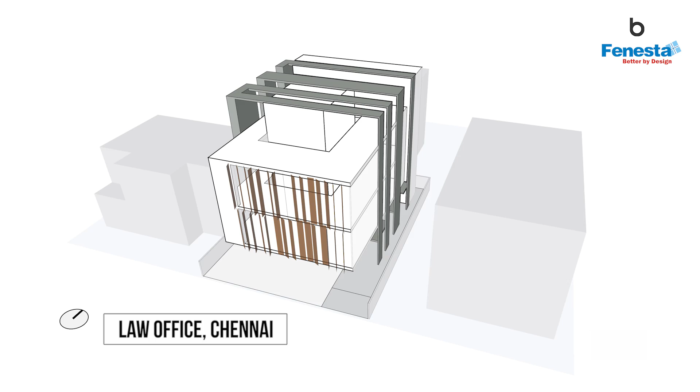This is one of our earlier clients. We started this project in 2010. This is an office for a group of lawyers called V. Shashadri and Company, and we were looking to build a 3,500 odd square feet office building in a stilt plus 2 configuration.

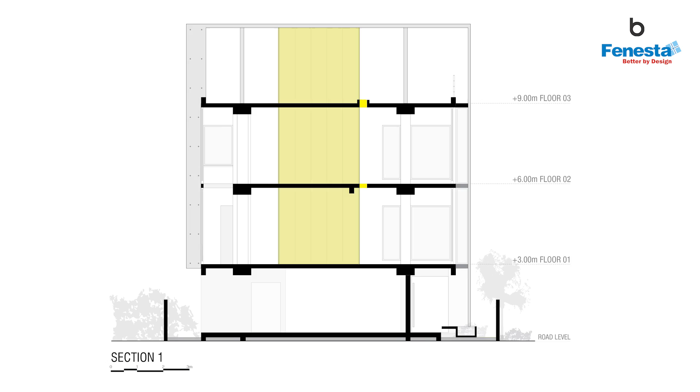Which is ground largely left open, and then 2 levels of occupied floor space above it. We needed the entire built-up area for her program spaces, and that to us was also the challenge: how do you bring in our value systems and our thinking into a project of this scale, and yet respond to the context it sits in.

So the site is located very close to the sea in a neighborhood called Besant Nagar in Chennai. It's a very low-rise but extremely dense neighborhood with a lot of vegetation.

When we went to the site, it had a small house in it, but it's almost like a void in a largely subdivided plot area. These are 40 by 60 plots, probably one of the smallest plots you can find in Chennai in terms of subdivisions.

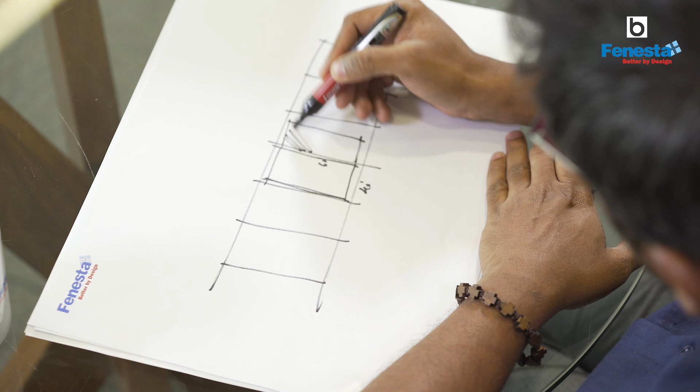Contextually, it has a lot of small buildings, most of them right next to the site. The other interesting part is that there's a lot of greenery, which is very characteristic of Chennai's traditional neighborhoods. And of course, the other interesting aspect is the sea itself.

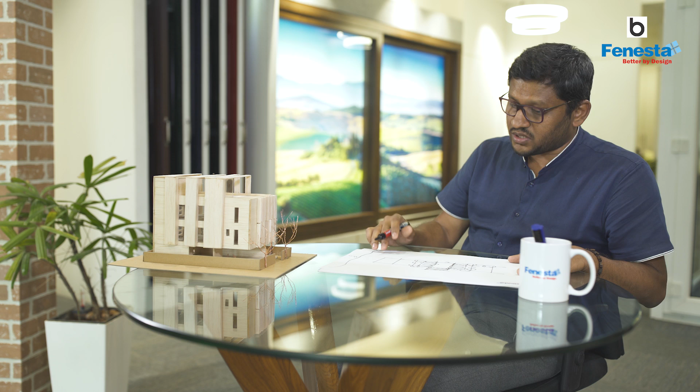It's very close to the beach sea, and it presented tremendous opportunities, not just the view to the sea, but also the wind that comes through it. So we had to capture that into the site. That's pretty much the context of where the site is.

It's largely in section a stilt plus 2 building, essentially a simple box with ground floor left open. What we've done is carve out a sort of a walkway within that ground floor area - that's a street.

Most of the employees, almost 70 to 80% of the people who work here, actually come through public transport. What we wanted them to do is go through a set of social spaces which maximize interactions, creating a sense of community within the 2 floors. People work in 2 floors.

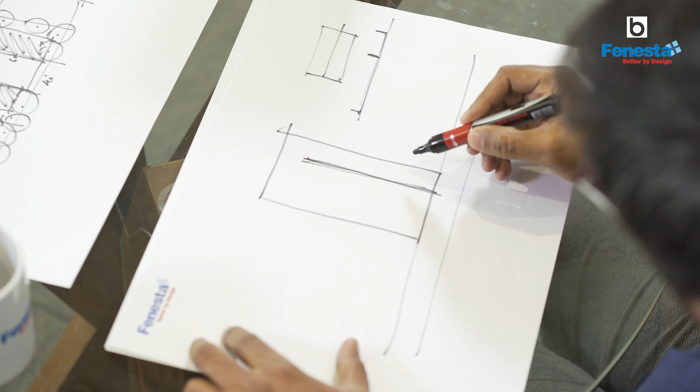This space carved out at the ground floor is largely a 5 to 6 foot walkway with a lot of landscape enriching it, with an existing tree right at the compound wall. You have a series of experiences, and you come in and explode into what we call a confined atrium space with circulation as a staircase at the ground floor.

It's a straight flight staircase with a lift that becomes, in many ways, the heart of the project. That is where the maximum interaction happens.

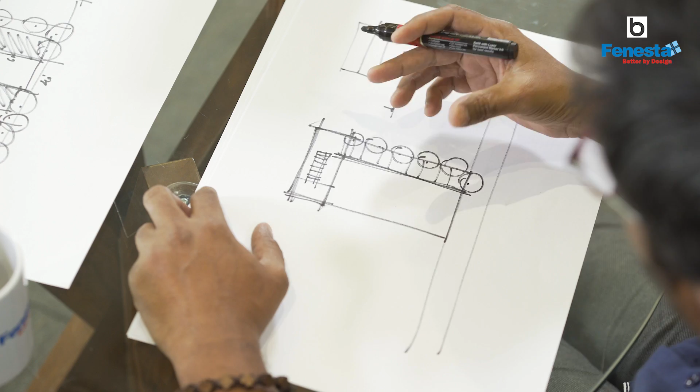You go there today, you'll see a lot of greenery starting to weave into those spaces. So once that ground is set, in section we created that atrium space, and then we had these floor plates which kind of came out of it.

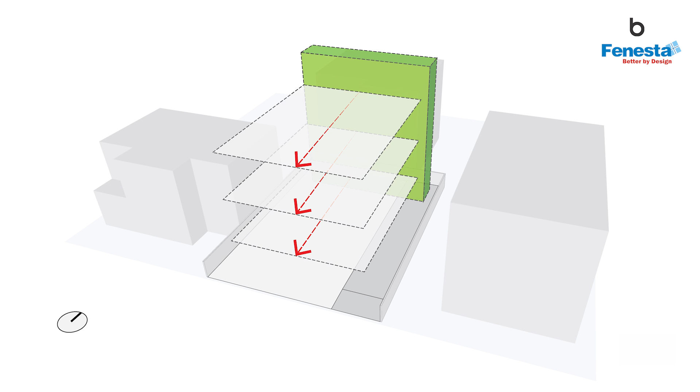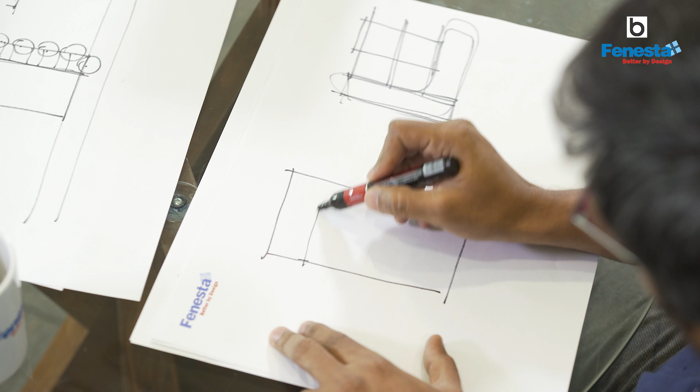We realized that while we created this interesting social space, we still continued to segregate them by floors, so we needed to find a way to connect these 2 floors. That's the first floor, and that's the atrium space with the staircase in it.

What we've done is insert a glass box into the middle of the office space, with a little skylight about a foot of cut out with glass openings in it. The circulation space on each of those floors is organized around it, with the rest becoming the programmed usable spaces. That's essentially the organization of the plan within each floor.

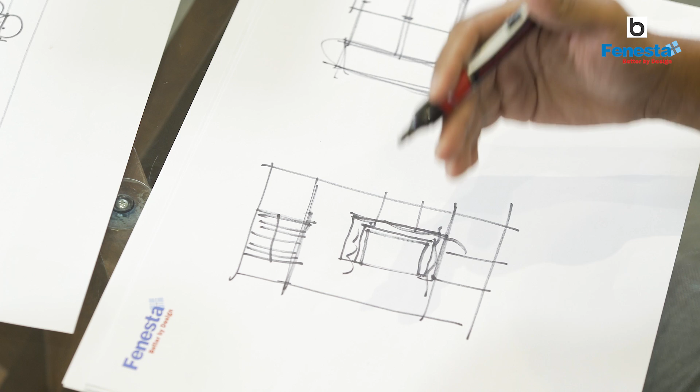What it does is maximize the light that could come into the middle of the floor plate. Otherwise, most of the light gets captured at the edges. The moment we did this, light started coming through the middle of the office spaces, and then the third component is the requirement in terms of storage.

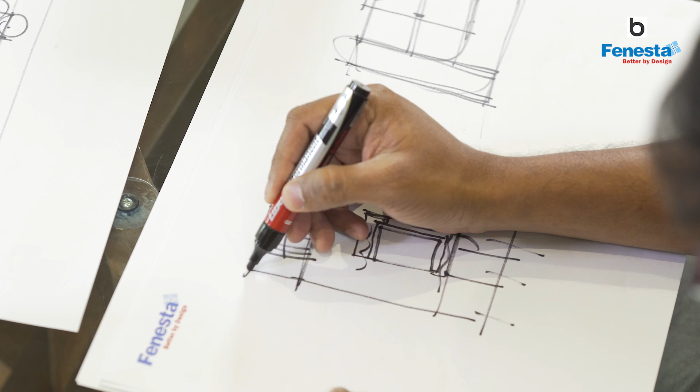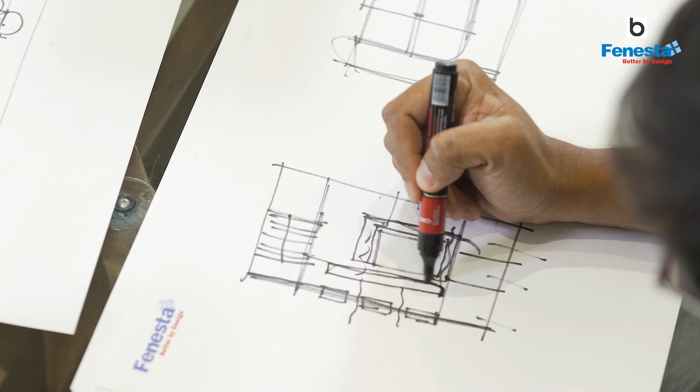Being a lawyer's office, there was a lot of requirement for documentation and storage of their various cases. So what we strategically decided is that there was a lot of exposure to the western facade. We organized these storage spaces into the western facade with thin slits, which allows light to come into that space, since there was a little library space as well. This is not a space where you work, it's where you go take the books - largely storage and documentation. It allowed another layer of thin slit windows, which let light come in a very interesting way, and it also acts as protection from the western sun.

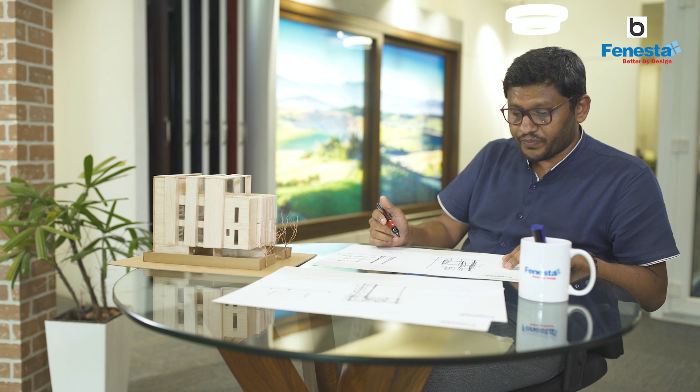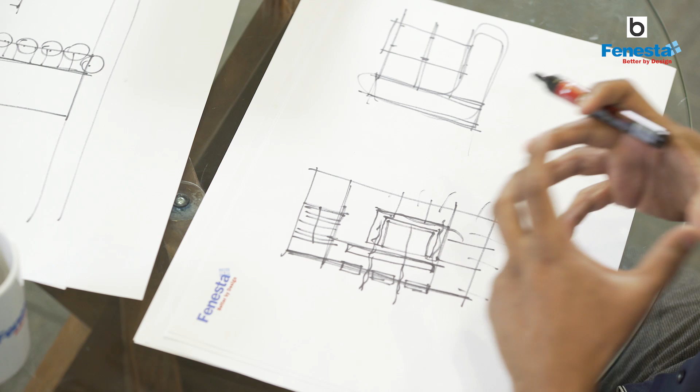Then suddenly concrete itself became very interesting to us. Once we did that, we wanted to tie this building together. We felt it was too much of a box, and we wanted to frame this building, which is otherwise completely hidden with trees all around. It starts to reveal itself only through these concrete bands on top.

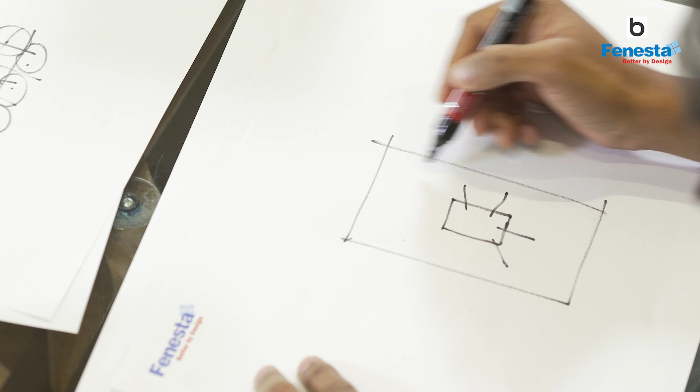So at the terrace level, the glass box comes up and almost becomes an informal space used as part of the terrace. These concrete bands, which were doing the function of storage at the lower level, came up and almost framed this building, wrapping around it.

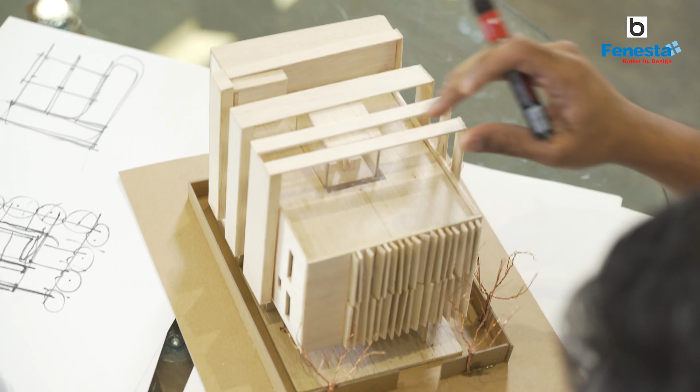You can see it here - it's a storage space, and as it comes up to the terrace it almost frames this, starting to frame the views to the sea. So you get a different perspective towards the sea, and this informal space opens up into the terrace. The concrete redefines itself and becomes a frame on the street at the terrace level.

As it comes down, it starts to engage with the various office spaces. Even though it's just a concrete band, it defines or does different things at different levels, and in many ways brings character to the building. I think that's probably the most critical part of it.

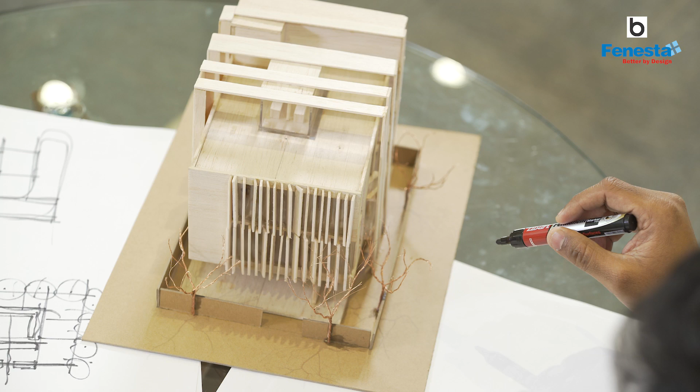It's a site which opens to the street on the southern side, facing the south street, and that was important for us. A lot of wind comes from the sea, and it was important to capture that into the building. There was one nice tree at the site, but it was extremely tough to accommodate in that particular location, so we transplanted it and put it right at the edge of the site. There was already an existing tree there too, so these two trees started to frame the building.

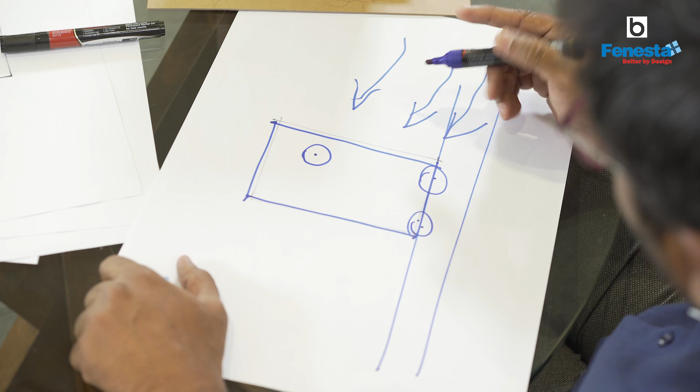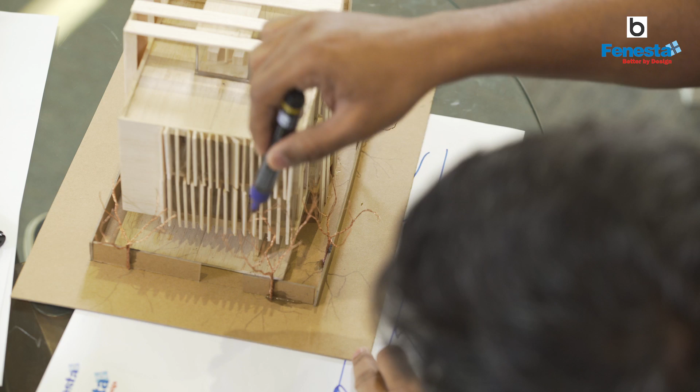The harsh sun comes from the southwest, so we introduced wooden louvers oriented in a playful manner towards the southwest to cut off that light. Over time these trees grew big, so if you go there today you don't really need the louvers functionally to protect from the sun. You see these louvers in a playful manner, and you can't see too much inside, but from the inside it's very interesting to look out into the trees and the street.

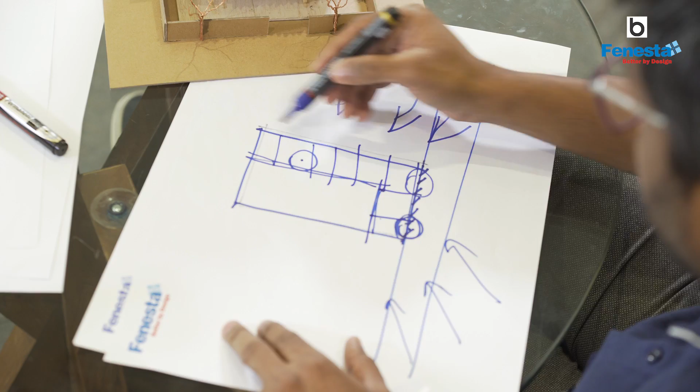The main conference rooms and main work areas are largely organized on the east and southern facade. So it becomes a very dynamic facade along that street, and with the layer of shadows, it becomes very interesting.

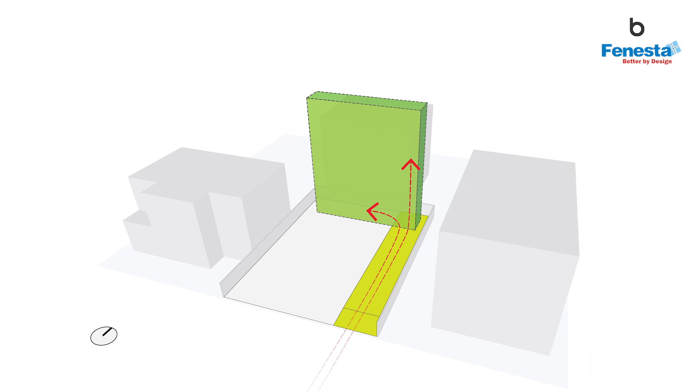In some ways we feel our project has to be one of inclusion, and our role as architects and artists is largely to find harmonies in the various thoughts that come with each project we do - that's what we do. Whether you take a little project of ours or a large master plan, there are many layers of these thoughts, and what we really do is try to find harmony in it. We feel sustainability lies in that, and it can't come from an architecture of exclusion. One has to engage with all, and it's very critical in our context, especially in India, because it goes beyond design aesthetics - it has to do with social sustainability, environmental sustainability, and also economic sustainability.